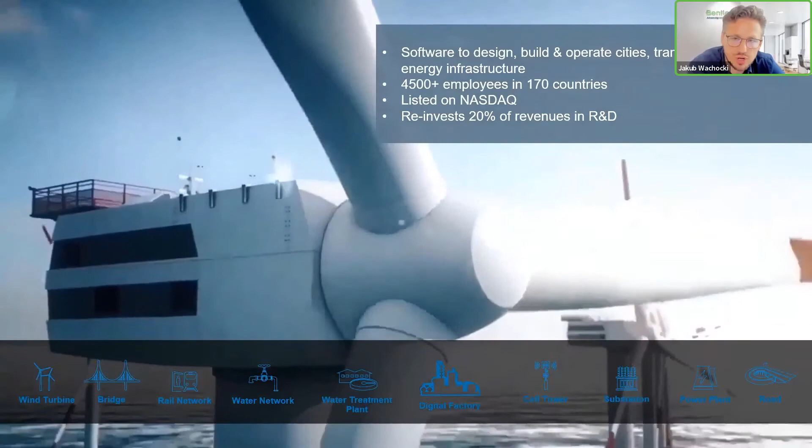A bit about Bentley: around the world, engineers, architects, constructors, owners, and operators are using our solutions to design, build, and operate infrastructure, which we want to be smart and sustainable. If you look at Bentley, most of the transport network, like water, energy networks, or civil infrastructure networks, use our technology one way or another. You can see some of the capabilities there or industries that we cover.

So let's look at the digitization of the built environment. I wanted to bring some examples to start with that you are, I think, very familiar with. If you look at some of the examples in Singapore, our software have been leveraged to design the structures of the ArtScience Museum, the structures of the Marina Bay Sands building, but also the geotechnical design for all the embankment below ground. Actually, I should probably use a more recent example where we have worked with Singapore Land Authority.

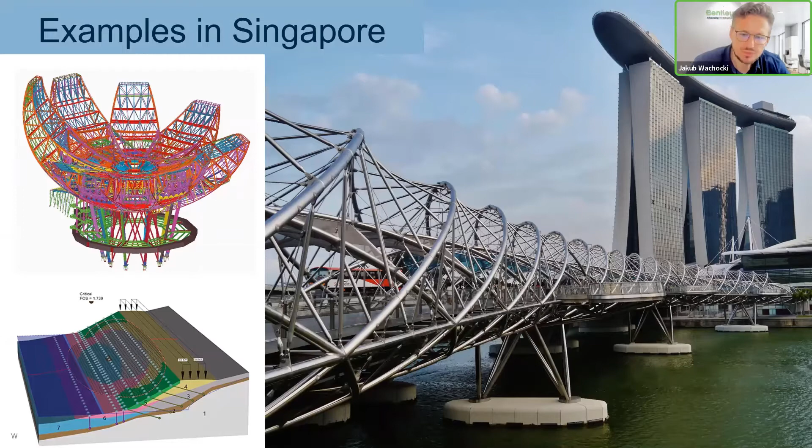To create a digital twin through our reality modeling capture of entire Singapore. What we see is more and more adoption of augmented reality technology, so imagine infrastructure that you can actually inspect remotely. This is now possible with something we call digital twins. We can use reality, using real-time high fidelity rendering, to allow multiple parties, civil engineers or contractors, to inspect potentially the same asset from different locations, saving up to 40% of the labor time. We have a strategic partnership with Microsoft to co-develop some of the technology there that you can see.

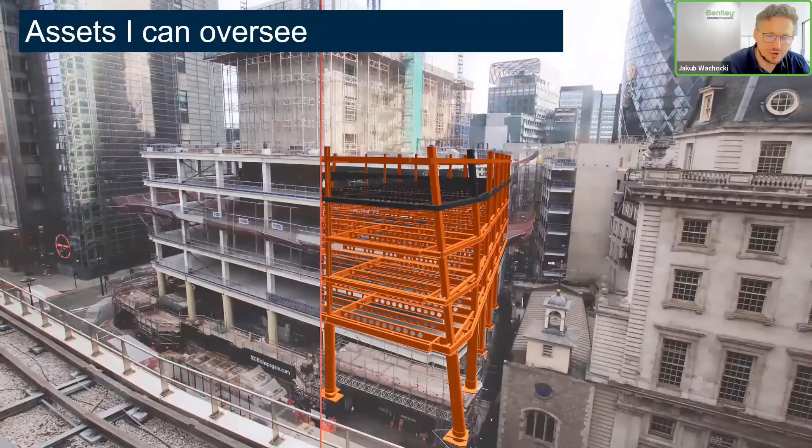But it's also for us assets that you can oversee, right, so it's about ensuring that we build twice. We build the virtual world and the physical world, and we can overlap the two worlds together to monitor the construction as it happens.

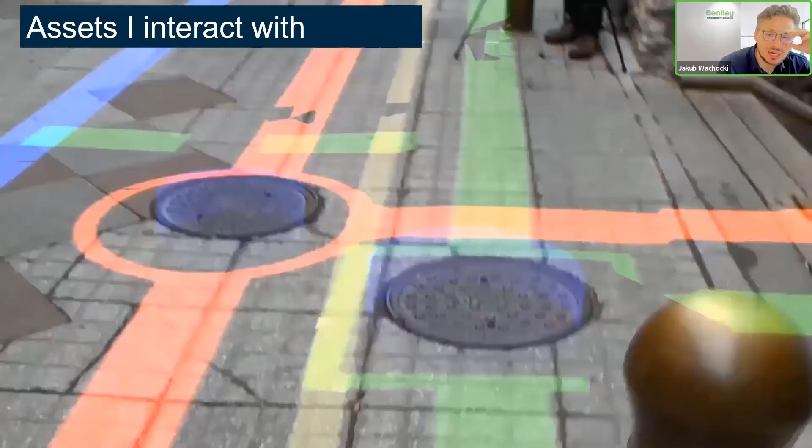But it's also about assets that I can interact with, and here we have a few examples of how the augmented reality technology again provides you the ability to interact with things, to visualize things, to comment on things, and generally understand each asset much better.

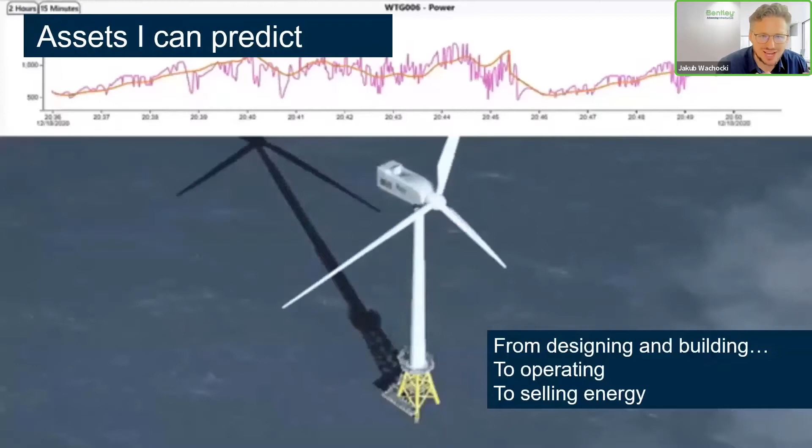But it's also about assets that I can predict in terms of performance. As you design it, then build it, and then operate it, here again the partnership, in this particular case with Siemens and Microsoft, because we've worked on the Microsoft Azure digital twins, where you can actually predict how much energy is being consumed or is being generated for the foreseeable future.

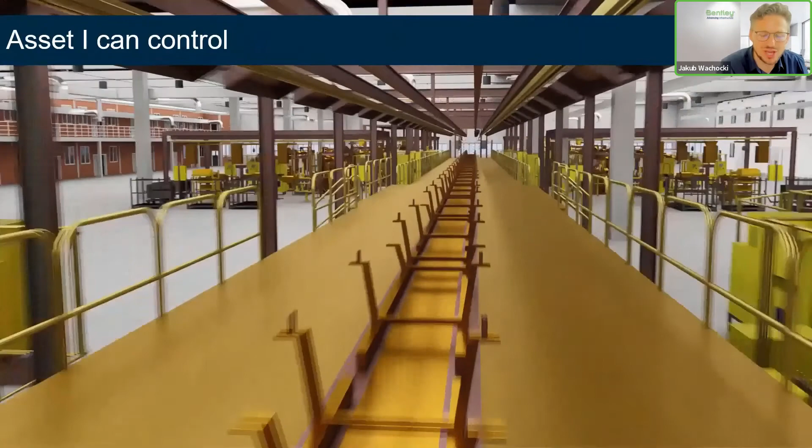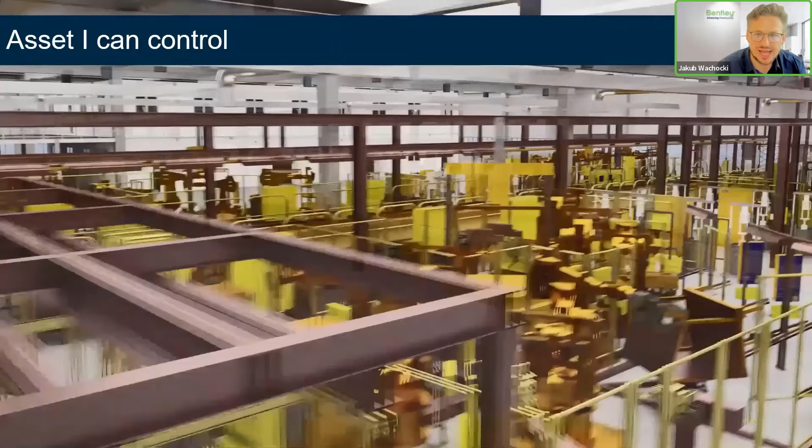And it's also about controlling assets. So we're also in manufacturing, when we're mostly looking at it from the built environment perspective, at the building for instance, and the structures. We've worked with many companies in the automotive space like Volkswagen, BMW, and in pharmaceutical space as well. So we can understand the needs and the key challenges faced around how do you pull this information together, visualize it, and make informed decisions.

If we look at other industries as an example, some have been in this space a bit longer than us. For instance, if you look at digital twins in Formula One, designers have been simulating the race between races to prevent accidents, optimize car performance, redesign parts, and maybe optimize fuel consumption. So what can we learn from this approach? The key outcome here is having cars that are safer, more reliable, with better performance.

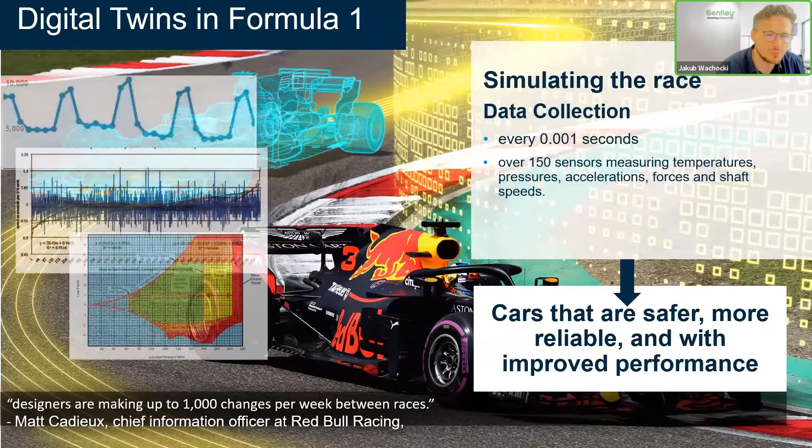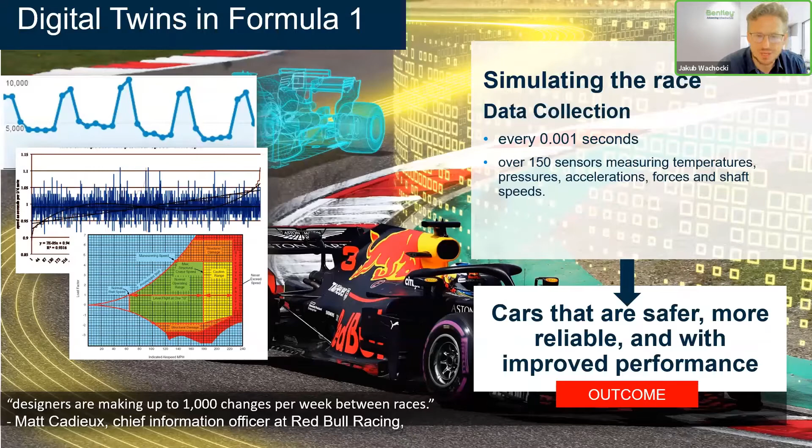So can we talk about better roads, safer roads, safer rail, more optimized performance for rail and road, or bridges, or buildings? I think these outcomes are still pretty much applicable, as other industries like the aircraft industry have been using the digital twinning concept for long enough, looking at simulating, for instance, the engine, to see how it's performing, whether we need maintenance, to redesign some parts, or replace some parts.

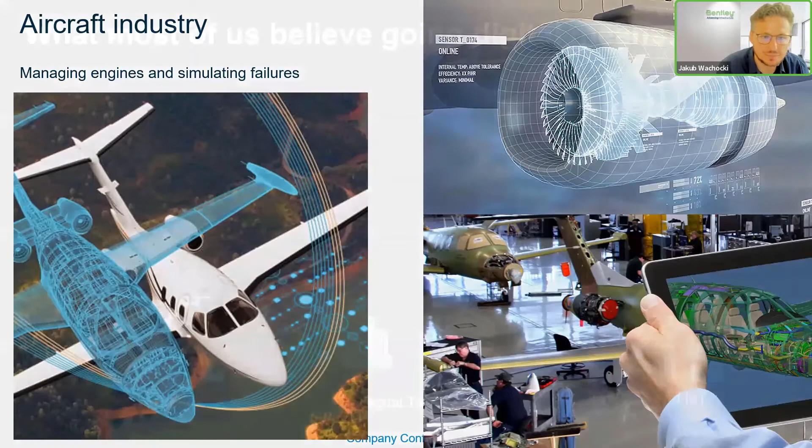What most of us think about the digital is mostly from a technology perspective. We have drones, digital twins. We see the advent of robotics coming together, providing this automated way of construction and operations. We see different technology coming from various consumer spaces. But ultimately what's important is what the technology will help you achieve. It's not technology for technology's sake, it's about improving outcomes like productivity, schedule performance, rework reduction, and better coordination.

The key question is how do you get from where you are to where you want to be, addressing challenges around project complexity. If you have a complex infrastructure project with road, rail, underground assets, and utility networks coming together, how can you visualize it and provide context for what's already in the ground or above ground to reduce clashes? When you design a road, a bridge, or a rail, you want to design it in context - you never design it in isolation. You need good spatial understanding so you can see and almost touch the digital and physical assets already there.

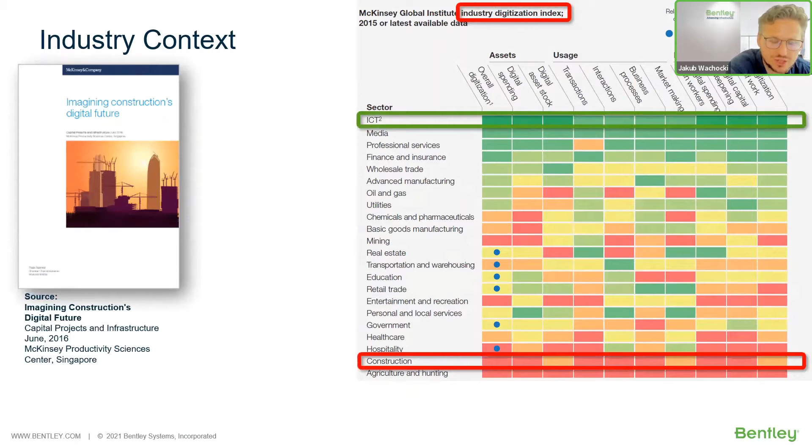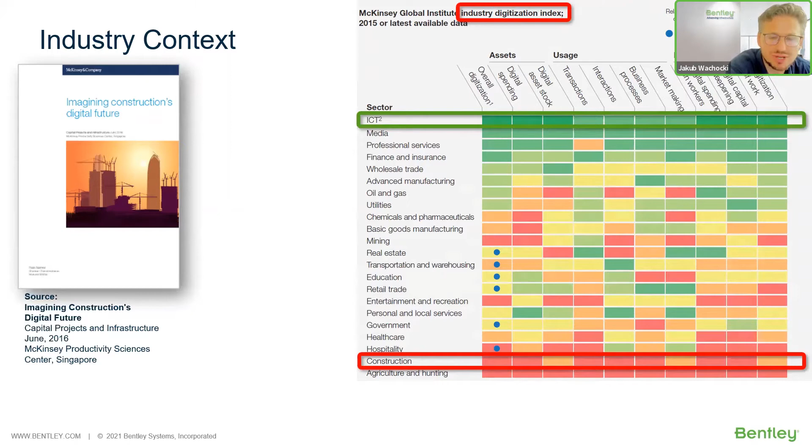The problem we've seen is that if you look at the industry digitization index, construction has been quite low in digitization - just above agriculture. This is from 2016, and I think we've made advancements since then, five or six years ago, but I don't think it's enough, honestly. Every industry is advancing, and I think we have much more to do, which means there's a lot of opportunity to improve these outcomes. As you step from university into industry, there's plenty of work to do in terms of how digital can help.

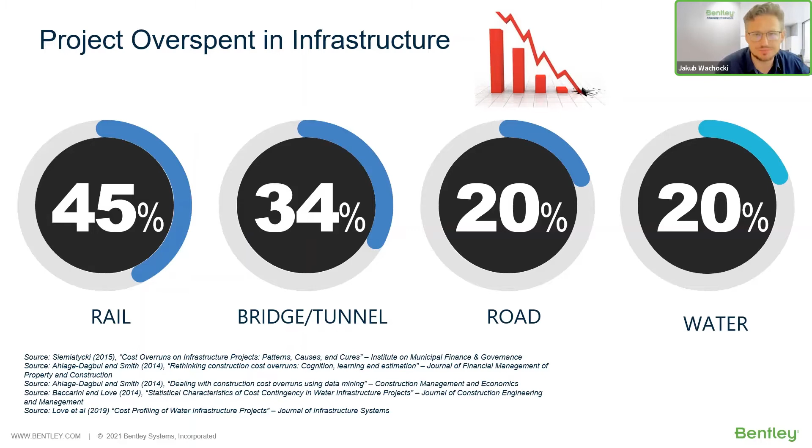If you look at the overspend on infrastructure assets, on average the overspend between what you plan to spend and what you actually spend is considerable. In the rail space, we spent about 45% more than planned, and this is a hugely important problem for how you budget and run infrastructure projects. The technology is there to provide improvements, and these are the targets from the UK around faster delivery, lowering cost, and emissions.

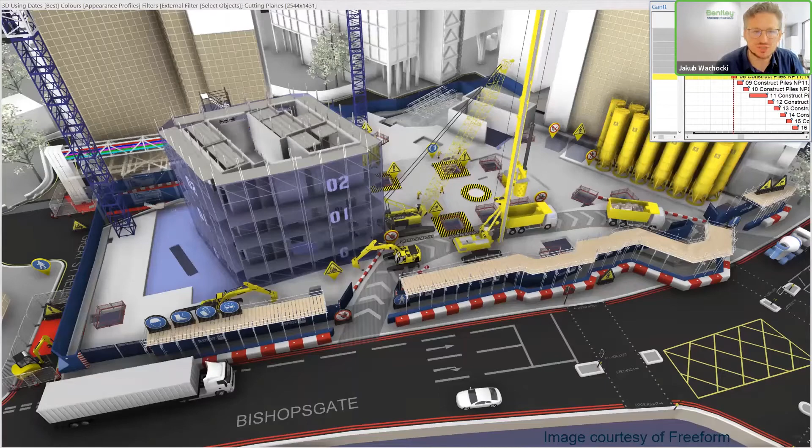What we see now is, as you're designing and constructing a road or building, we have information available in various forms - 4D, 3D, 5D - so we can make more informed decisions with information at our fingertips that provides transparency. Especially with tight locations, like these towers in London trying to bring materials to site - someone needed to design the access road and design those buildings. These are the engineers that have done that.

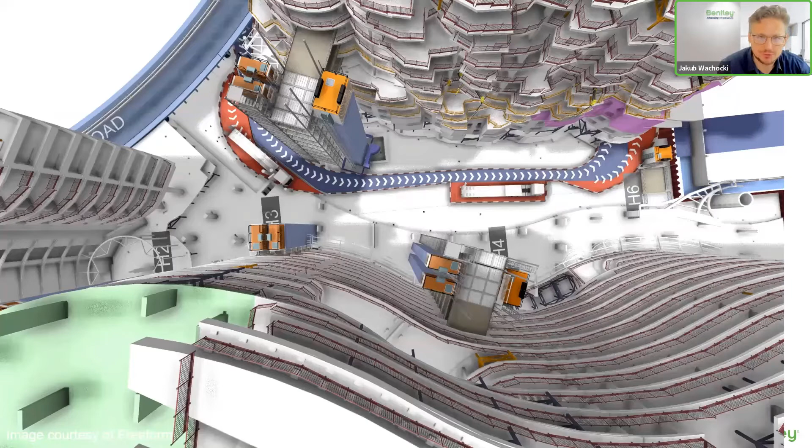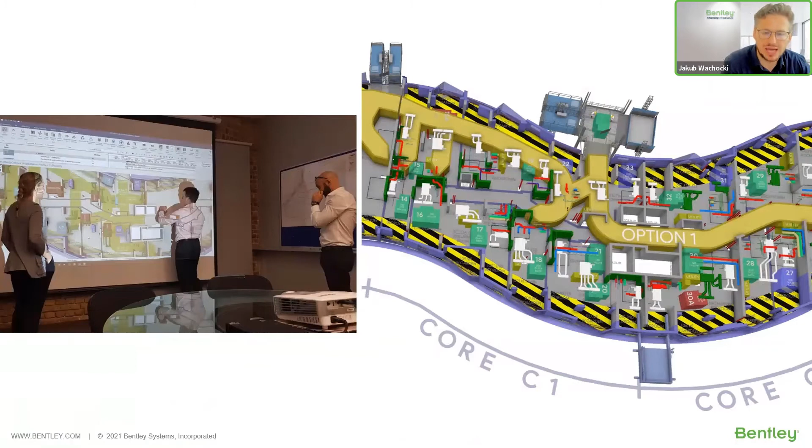This information, whether graphical or documents, needs to be brought together to collaboratively plan how you install these assets - how do you bring mechanical equipment into tight spaces, what's the progression, what's the sequence, who's doing it, how much does it cost? But this is only possible if you have proper 3D, documental, and other non-graphical information in the first place.

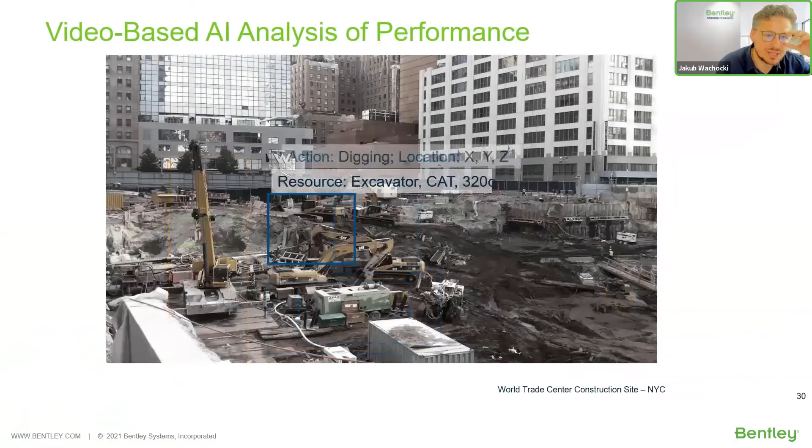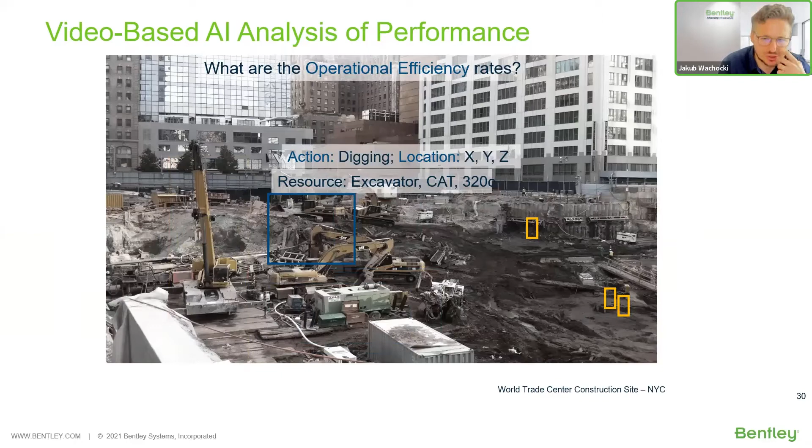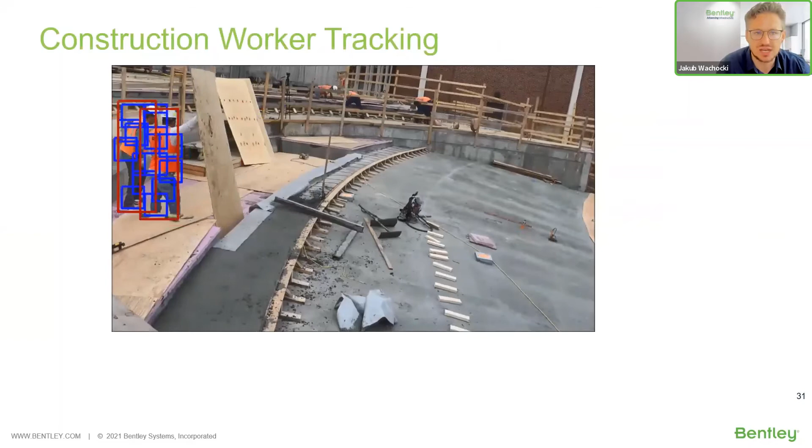Here are some other capabilities from research, around continuous monitoring of sites through web cameras, where you can start to recognize assets and their activity. Here's another example of monitoring what's happening to prevent accidents and ensure a safer site.

Finally, as you bring this information together, it's not just about graphical information, it's also about non-graphical information presented in a unified form - whether looking at the cost, what type of assets are there, or as you have a beam or a piece of road, how lengthy it is.

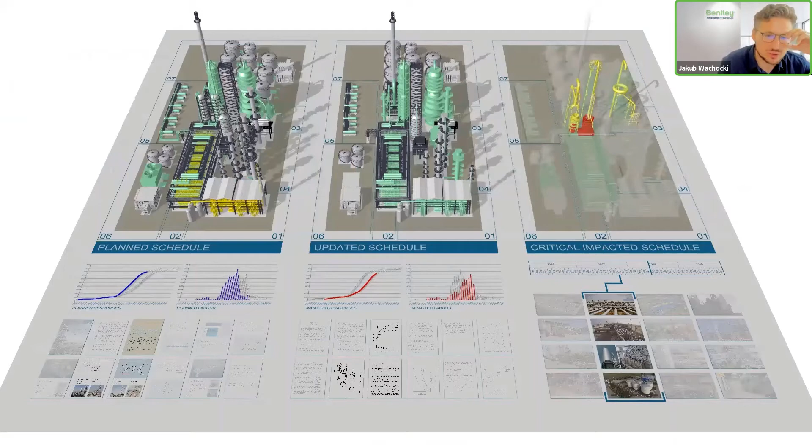How much concrete do I need to build these assets? And therefore, do some scenarios around what we planned for, what we actually updated the schedule as we're installing and constructing, and maybe look at what's the impact if there is some delay on site.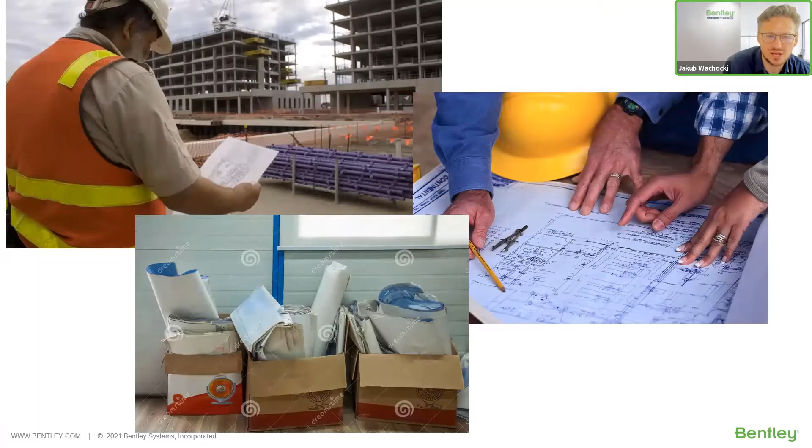And if we want to spot the difference, I show it quite often in terms of what's happening on site in the construction industry, where you have paper-based workflows, versus what's happening in other industries like logistics. Take examples like Amazon or Lazada or other e-commerce platforms, how they structure information, how they handle all the physical goods. The question is, do you want to be seeing a site that's misorganized and messy, or do you want to see a site that's really automated and every object is really clearly well defined, so we can manage the installation, be always on time and on budget.

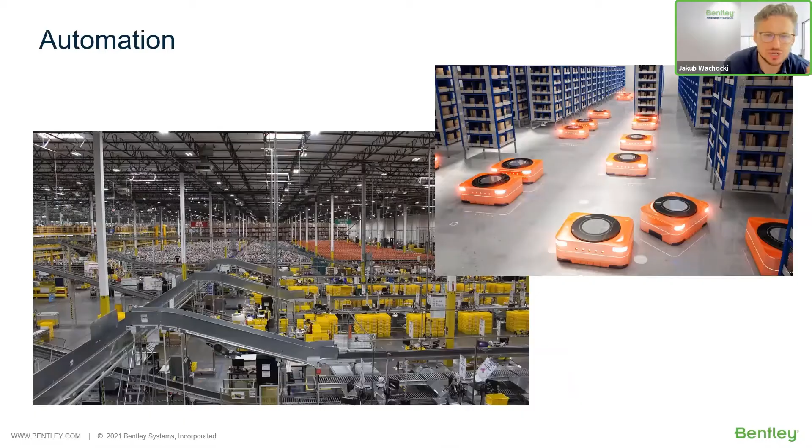I don't want to go too much into detail here, but for me this is a conceptual exercise on how do we ensure that from the operations, once you install an asset, and let's say you have typically most of the roads, most of the assets already exist. 99% of assets of infrastructure already exist. So you never really start from scratch.

So the question you want to ask yourself at the beginning is: is this existing infrastructure fulfilling the needs? Is it too costly to maintain? Do we need to do something about it? Then you start to plan in terms of a strategy. What outcomes do you want to get for society, for the owners? For instance, you want to have reduced time to travel from Changi to the West Coast. You want to see, okay, how do it, it takes us 2 hours or 1 hour, whatever, and maybe you want to reduce it to minutes. This is the way all these major connections have been planned, to identify what we're actually trying to achieve with building new infrastructure assets.

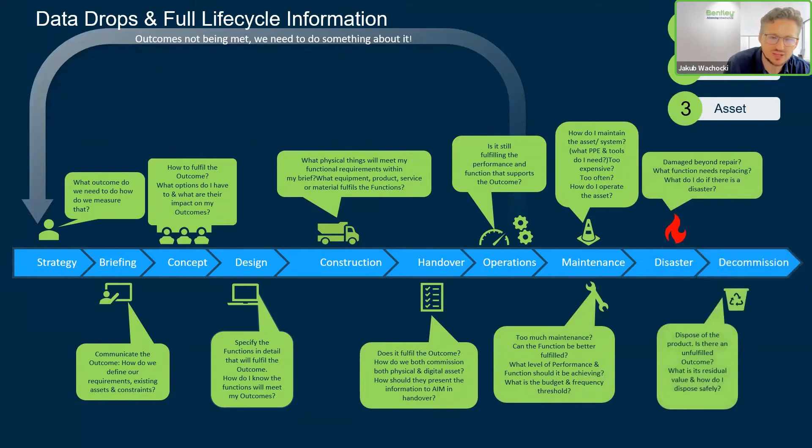We then brief the team, we conceptualize the solution, we design the solution, we build it, and we hand over to the owner. So I want you to keep in mind this full life cycle of planning, and even what do we do when there is a disaster, and how it works in terms of building, identifying the outcome, looking at the functional specification on what the road or rail or building needs to do, building these digital assets, which would be your BIM models, your schedules and information, and then finally building the physical assets based on that information.

I'm not going to go too much into detail, but what I'm trying to say is that we need to start to think about something we call TOTEX, which is the total expenditure across the asset life cycle, including the environmental impact of the infrastructure we build. Typically most of the focus is on capital expenditure, what we expend to design and build an asset. But the cost associated with designing and building an asset is much smaller compared with the costs of operations. The decisions we make in design and construction have a great impact on what it costs to operate and maintain. So as an engineer designing a road, rail, or building, you need to keep in mind operations as well, and the environmental impact, which ultimately has a cost on that asset.

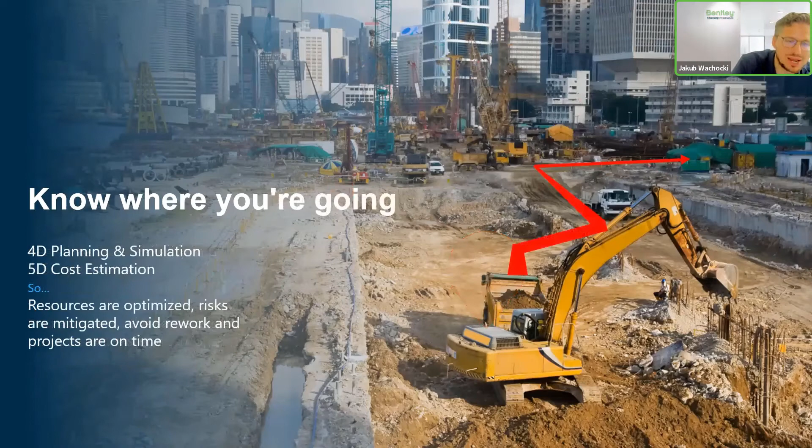So for me it's really about knowing where you are, how much road, how long is the road, how much concrete do we need to pour, how much have we already poured, how much more do we need to build. So everybody is on the same page in terms of the construction schedule, knowing where we want to go, what's the plan, and get there faster through automation, ensuring we have more quality content in there.

But again, for me it's really about finding the answers. And finding the answers starts with knowing the questions. For me, the information models, whether digital twins, BIM models, or whatever it is, is really the answer to a particular question. But the question is, do we know the right question? So what do I mean by that?

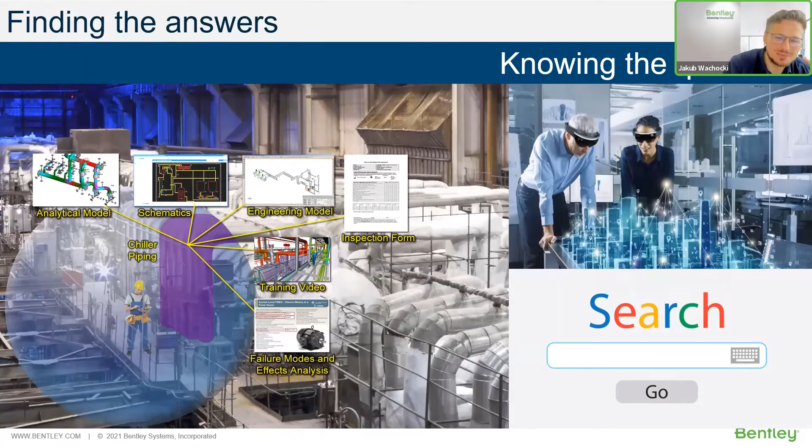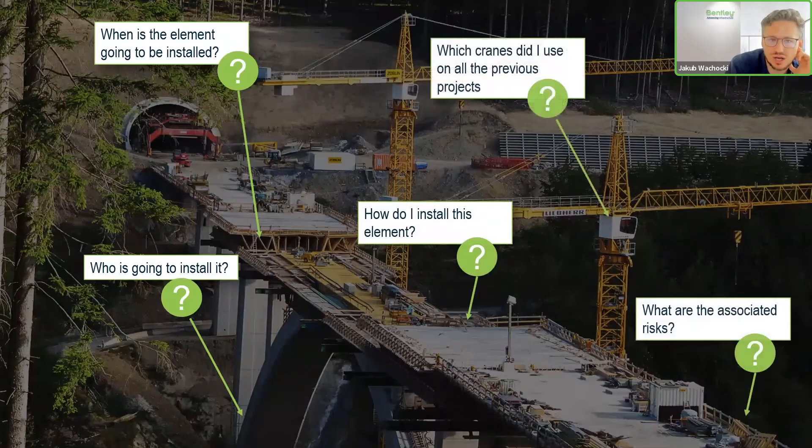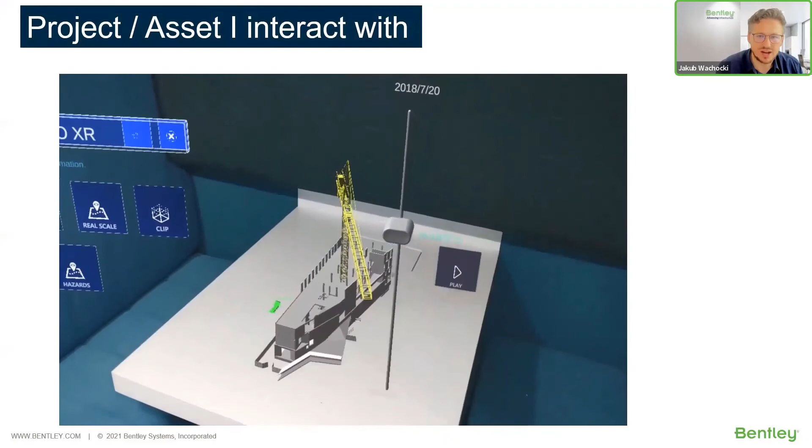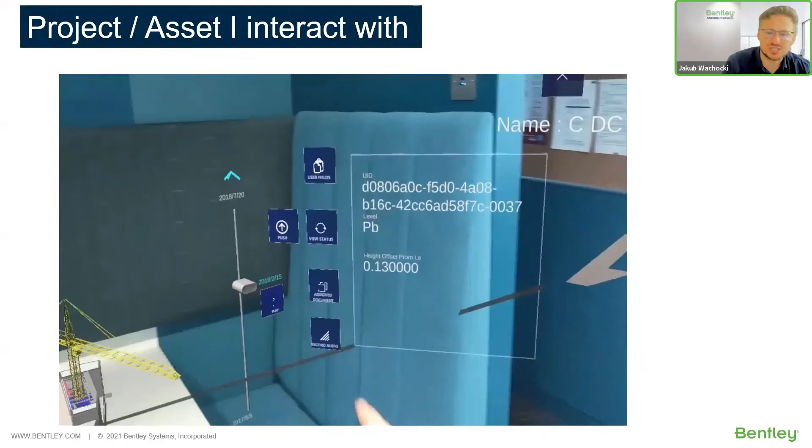Well, if you look at a tunnel, a bridge, a road, the questions could be things like: when is the element going to be installed? Who is going to install it? How do I install this element? What are the risks, and so forth? And then we can provide the answer. Then we can build the model. We can start to use AR to explore that information and perhaps flag issues, risks, inefficiencies, clashes in terms of design, clashes in terms of schedule, and we can have a very programmatic and transparent approach to design, construction, and finally operations.

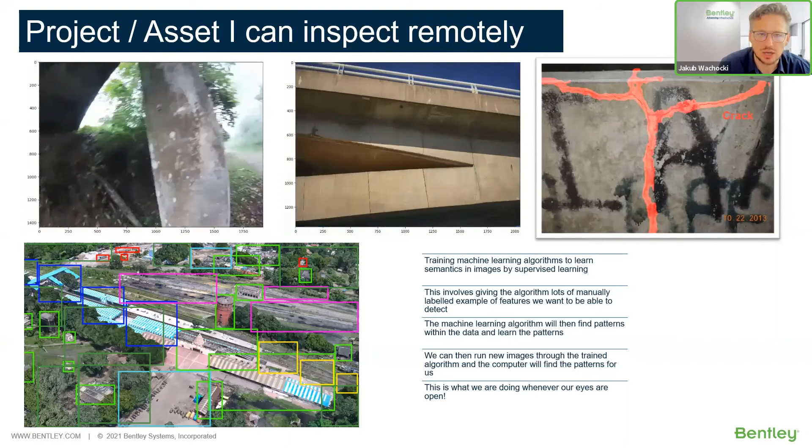Once we build this asset, there's a lot of opportunity for engineers, because 99% of the infrastructure already exists. So a lot of the work you might end up doing is not designing new infrastructure, but building the information models for existing infrastructure. We have technology that helps you recognize the assets, and also recognize their state, maybe there's corrosion, maybe there are cracks in the existing infrastructure, so we can maintain it better.

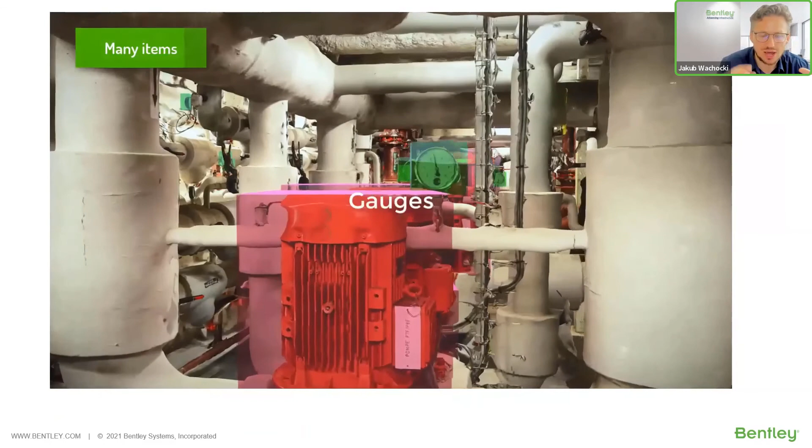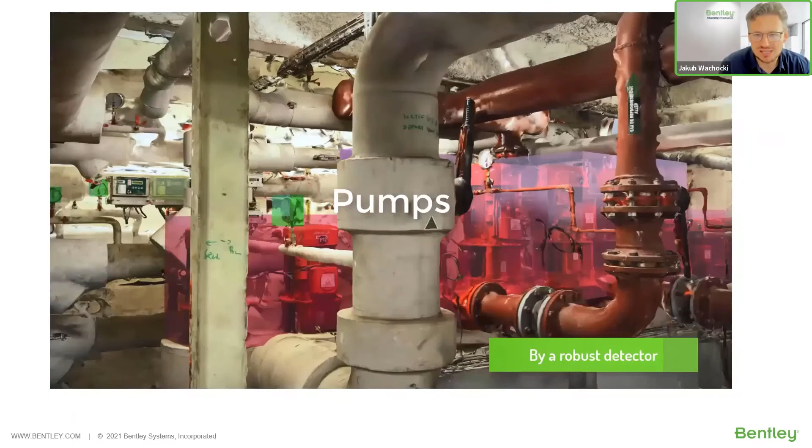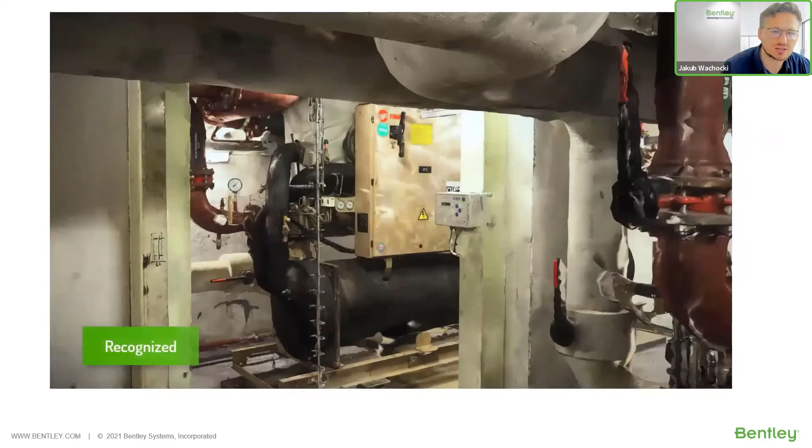Talking about asset recognition, we now use AI to recognize objects. What you see here are 3D models made out of photographs, maybe 100 photos, maybe 200, sometimes 1,000 photos. Our technology can assemble all these photographs, build a 3D model out of it, and recognize the assets, so we can recognize that this is a pump, this is a gauge, this is a valve, and so forth. We're building an asset recognition capability to do that.

But the key idea is, as you're building all these different assets, all this different information, how do you ensure it can be brought together and consumed by everyone on the team? A typical project team sometimes has thousands of people working on it, hundreds of companies, whether it's the designer, the builders, subcontractors, people who pour concrete, people who install steel, and all the supply chain involved. How do you ensure there is good visibility of that information?

At Bentley, we made an important decision a few years back to release our key technology as open source. So you can now take our iTwin technology and build applications on top of it. You can take the source code from GitHub and build new use cases and technology on top of it. To do that, we need a federated and open approach, bringing together IoT data, the Internet of Things, engineering data like 3D models, CAD data, non-graphical data, all the surveys, underground and overground, to make this a useful digital asset.

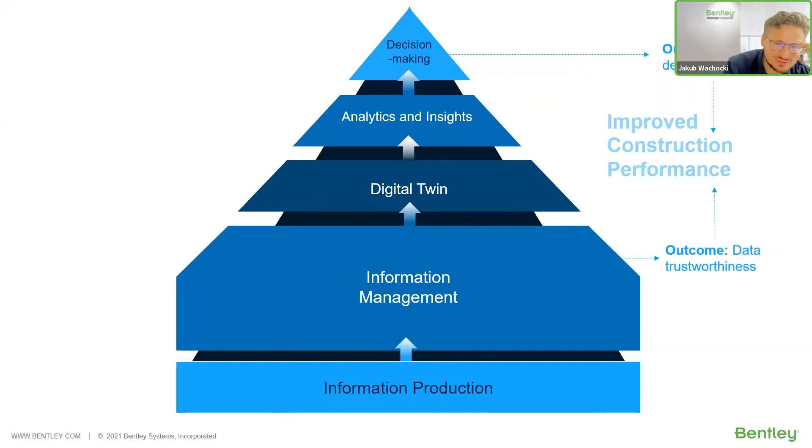There's one last concept I wanted to leave you with: it's about change. When you try to implement new capability on your projects, in your teams, you'll see that about 70% of change efforts fail. So it's not really about pure technology implementation, a lot of it is about creating the process, building a vision that everybody can subscribe to, and then enabling people to actually adopt the new processes and workflows.

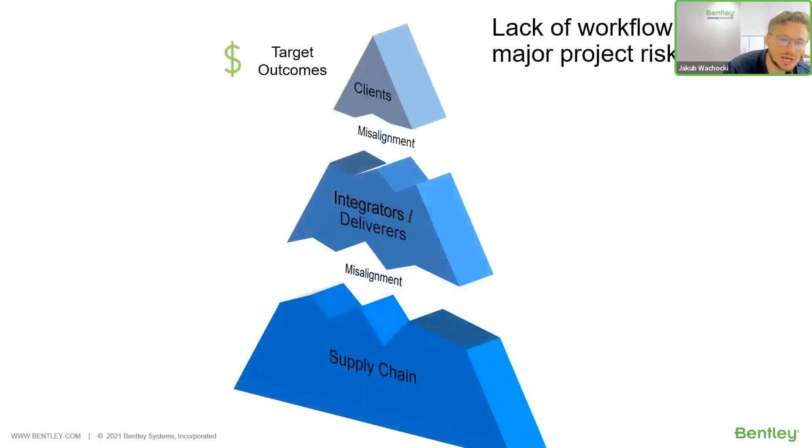The problem typically manifests itself when, for instance, on a typical infrastructure project, you have a client which might have certain target outcomes in mind, perhaps on-time delivery or on budget. There's a big divide between the supply chain, the people who manage the delivery and the people who do the delivery, whether these are engineering firms. So there's a big misalignment, and we often work with companies to create a success plan, which is like a strategy for execution, and then onboard the key stakeholders on this journey.